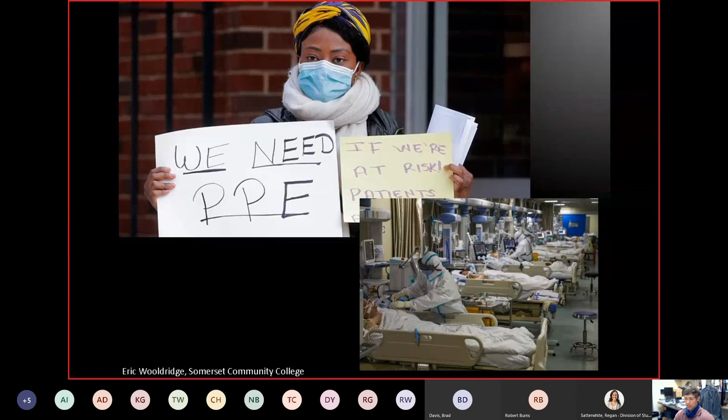Everything seemed to be great until this happened, and suddenly we're starting to reconsider the validity of that approach. So as the supply chain broke down, we needed a fix. We needed something to hack the supply chain, a stopgap solution, some way to come in and actually produce what we needed even though our entire system had collapsed.

And that is where we talk about today: 3D printing. In that moment, all of these do-it-yourselfers, folks that had 3D printers in their basement, teachers, companies that had banks of 3D print farms in the tens and hundreds, stepped up to the plate and said, we can help. We know you can't make what you need to have, but we can 3D print it for you. And so you saw the rise of additive manufacturing into the mainstream spotlight, because even though everything else was shut down, people could still 3D print.

Why did it work so well, or why is it able to step in that way? It's for a variety of reasons. When you 3D print, a single operator can run 30, 40, 50 machines by themselves, so it reduces your actual potential contamination or spread. 3D printers typically work off a condensed material supply, like a roll of filament, a bag of powder, or maybe a canister of resin, so you can take a condensed amount of material, put it in a printer, and get a lot of products.

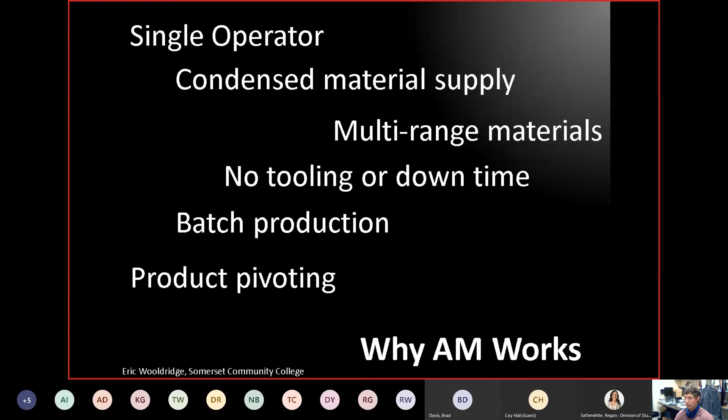If I want to do a face shield, I can. If I want to do a face mask right after that, I can. If I want to print them together, I can. This ability to pivot, to do product pivoting without any tooling or downtime, is a tremendous difference from conventional manufacturing. That's why additive was able to step in and start with face shields.

One of the very first things mass produced as a result of the supply chain breakdown was the face shield. A company called Prusa Research over in the Czech Republic — some of you may actually have Prusa printers, which are very popular — stepped up to the plate and said, all right, we're going to divert our 500-plus 3D printer bank and start producing face shields. We're going to design the face shields ourselves so that they are optimized for 3D printing, put videos on how to put them together, and share our files with the world. So not only are we going to do it, but we're going to make it possible for everyone else to do it.

And from that, thousands upon thousands of face shields were produced worldwide because of that initiative. That was the first thing. But then that got people thinking: what else could we do with a 3D printer in the midst of all this? Could I make something that someone else needs? Can I come up with a new solution that no one else has seen before? It unleashed the potential of the technology because people saw it as the thing that could keep going when the supply chain broke down. Case in point: a hospital over in Italy doesn't have these respirator valves, can't get them anymore, and obviously these are critical to human life in the middle of COVID.

So a company pops up and says, you know what, give us one, we'll make a model of it, and we'll print you what you need. We can do about 100 in 24 hours. That makes a huge difference.

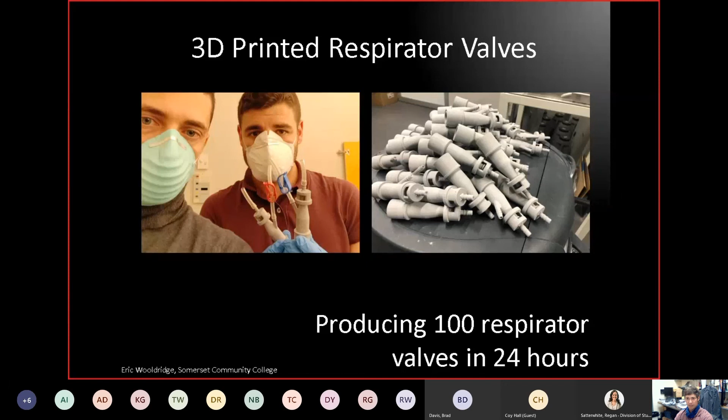And so it was one of the early ones that we saw, especially over in Europe, and that just spurred on other ideas. Somebody else said, hey, you need a stethoscope? We can print that for you. We can use these printers that we have right on our desks to make these products.

Another company steps up a little later on in the outbreak here in America. Formlabs diverts 250 of their printers up in Ohio to start producing the swab test kits. They can do about 100,000 a day using their printers. This was actually a pretty interesting process because we were a little privy to some of it, since we were considering it for Kentucky production as well.

It was a quick turnaround. We just had to have the right material, resin, and design, and it was ready to go. It was no problem to actually fire up and start participating in this process if folks wanted to. It just shows the power and how quickly somebody could step in and come up with a solution just because they had a 3D printer and knew what to do with it.

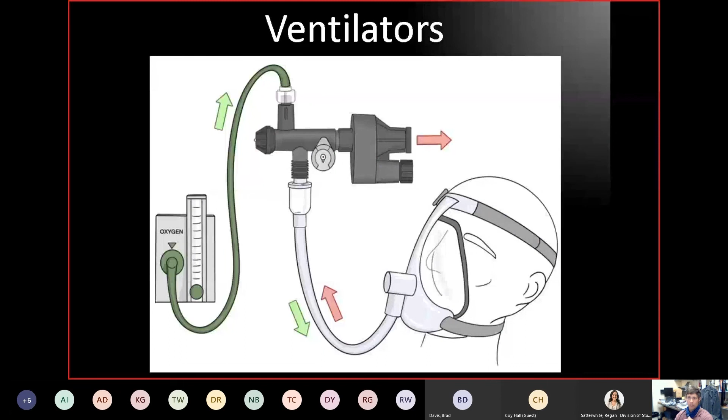Ventilators. This is basically the device that keeps the oxygen flowing one way and the carbon dioxide flowing the other way. The DoD did this. They came up with this nifty little ventilator system, totally 3D printed, and so successful they even commented that when this pandemic's over, which who knows if that'll happen, we might be able to use these in the field. They printed so easy, they're so portable, and the size is so easy to use.

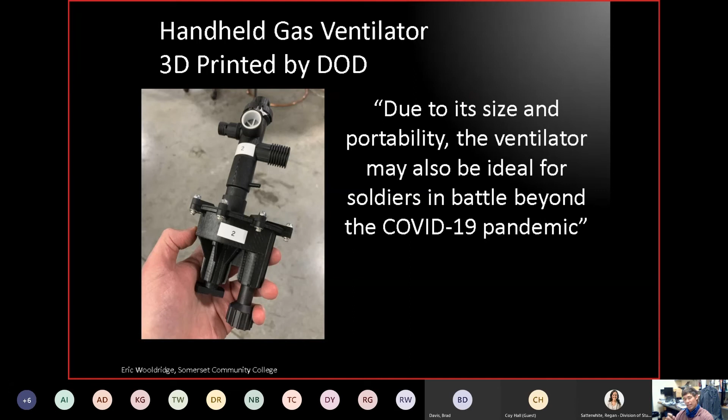This is great. And then, of course, the face masks. All kinds of 3D printed face masks are out there at this point in time, whatever style you like. The kind that are just basically a ring that fits over a cloth. The kind that are very complex with lots of parts that are medically approved, maybe not necessarily N95 but really close. The kind that are more simple. The kind that use adapters already out there to make it fit around your face. Limitless possibilities in terms of the face mask.

One of the projects we're working on with UK right now is also a 3D printed face mask, but we're going to use nano coating. UK is going to apply nano coating over top of some of the components, some of those discs you see there on the bottom left, so that it'll actually kill any microbe, any virus going in or out. So these 3D printed masks can be completely reusable, washable, and we can even incorporate them into our HVAC systems to purify the air.

Amazing technology, simply because the 3D printer will, if you understand how to use it, do what you need. Oxygen masks were made. We saw hospitals starting to realize they could 3D print parts that they normally had to buy but couldn't find anymore. So if you just had a printer, you could actually make the part, if you understand what you're doing.

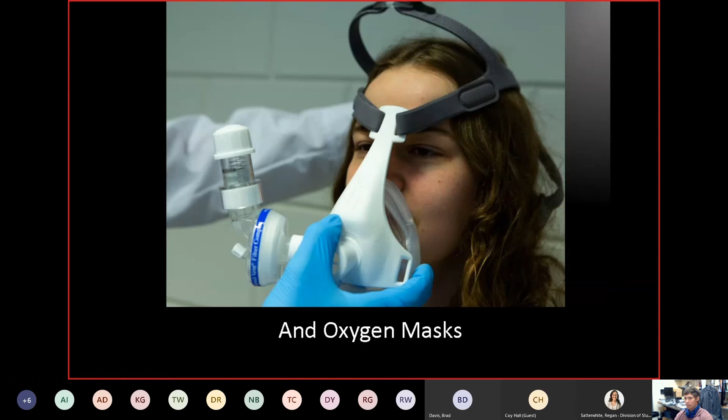Companies would step up and say, well, we're going to divert some of our more industrial 3D printers to assist in this too. This HP multi-jet fusion is an amazing system, super fast, super precise. They could take one and actually make 50 to 70 face shields or face masks in one run. And it creates more of this mentality of, we can support with what we have.

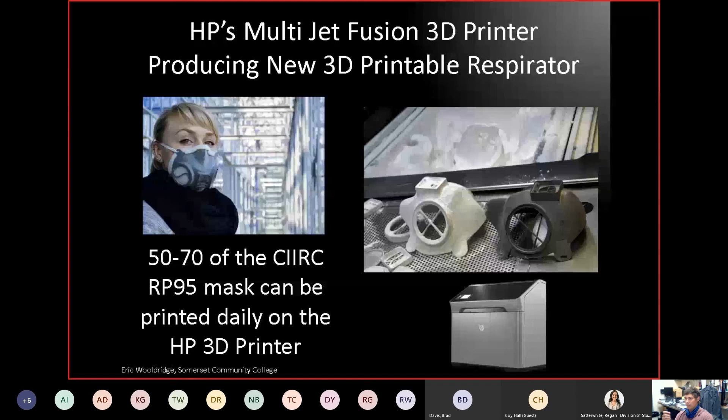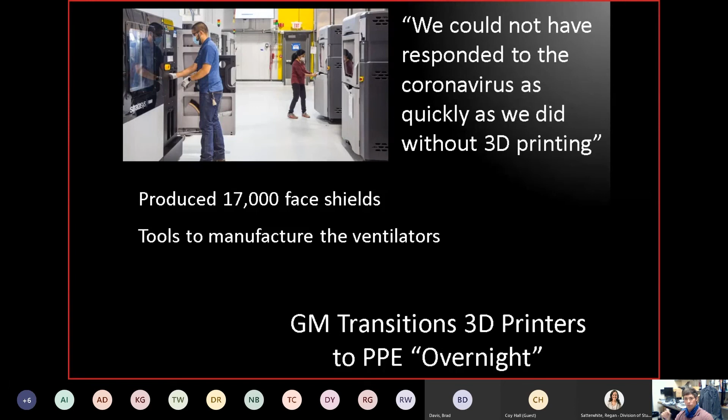GM, same story. They point out that almost overnight they were able to switch over their additive group and start producing 17,000 face shields. They made the comment, we could not have responded to the coronavirus as quickly as we did without 3D printing. Aside from the face shields, they actually 3D printed the tools to help manufacture the ventilators they were supposed to make.

And then simple solutions. You don't want to actually touch the handle of a door. Materialise came up with a design and put it out there for free that you could print a bracket off, screw it together up top your door handle, and use your forearm. You won't even go that far? You want to use your foot to open a door. There's several versions of a foot gripper that you can buy, screw into the base of your door, and open your door with your foot.

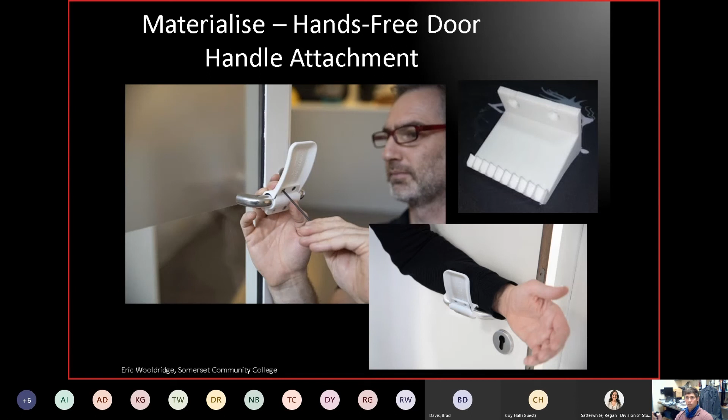Handy innovations, ready to go. All you have to have is a 3D printer, and not even that great of a 3D printer. Most of this work can be done on what we consider a low-cost printer. Stuff that's a little bit nifty, maybe a little bit more trinketish, but still a neat idea.

You want to keep your hand sanitizer from being contaminated by your hands, you can have a wrist brace that attaches it to it. At least people are creating solutions simply because the printer can make it for them.

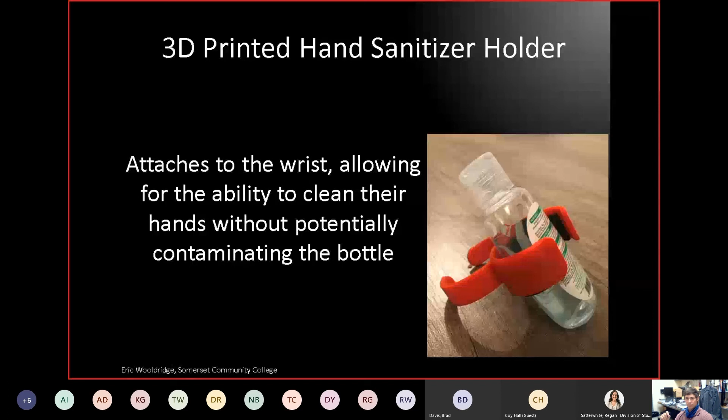A little bit more complex. Ventilators and respirators themselves are typically very complex, commercially made products, tens of thousands of dollars just for one. And so there became obviously the need to find a lower cost option. Fortunately for Spain, in Barcelona is where actually one of HP's 3D printing headquarters are. So they teamed up and came up with a 3D printed, medically approved respirator.

And you can see the parts on the screen there. They're actually really good looking parts, and that's because the HP system is actually a very, very good printer. But you can actually have a commercial product ready to go, developed in a matter of days or weeks, and ready to go out there and save lives. And then you can just start producing it as soon as it's ready.

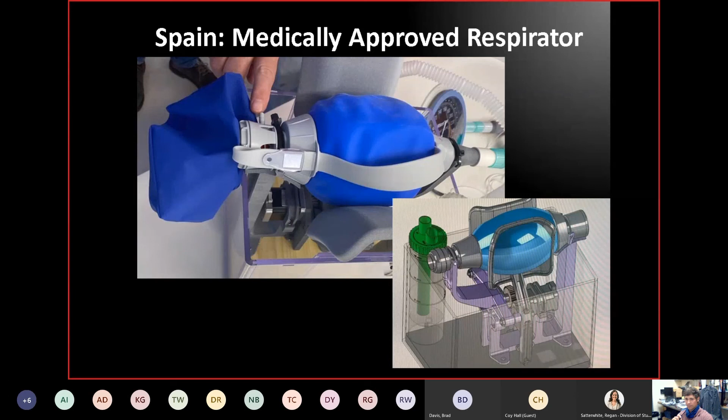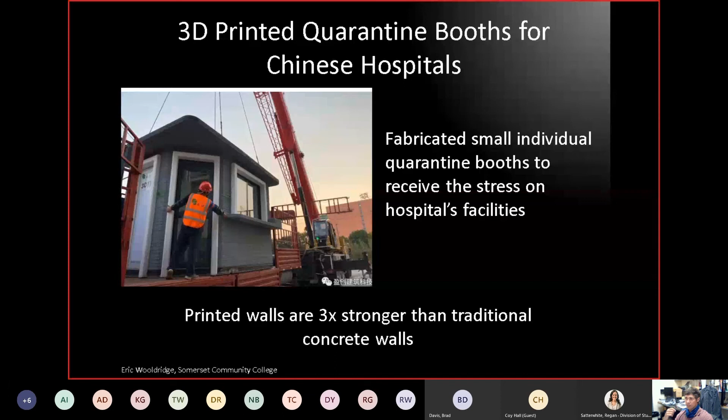Want to go a little bigger? WinSun over in China was 3D printing, and probably still is, quarantine booths for Chinese hospitals to reduce the overload. Basically prefabricated little booths where people can actually stay in quarantine, and they're actually printed in concrete, which typically is about 3 times stronger than a typical concrete wall. So you're seeing opportunity after opportunity after opportunity.

As far as SCC, what did we do? Well, our story kind of goes like this. We were already in the process of expanding 3D printing across the state, doing the courses, the curriculum, and that sort of thing.

We had just come off spring break when the semi-shutdown happened. We had about 3 days where we were planning on bringing students back, and then by Wednesday, it was pretty much said that we're going to have to switch everything online. They're not coming back. At that same time, we were seeing the impact over in Europe. We were seeing that the situation was pretty bad. The supply chain breakdown had occurred, and we were getting requests already to join in the worldwide contribution of 3D printing, PPE, and also parts that they needed for equipment, and sending them to Europe.

So we reported on that Wednesday into administration and said, you know what, this is probably going to get bad. We're probably going to need to prepare our labs for production to assist in this process, because it's coming. We saw the signs. At that time, we weren't getting authorization, so we did have to shut down the lab for Thursday and Friday. But then Monday came.

The governor's office contacted KCTCS and said, what can you do? We got together, and by that afternoon, that evening, we got approval to go back in the lab. I showed back up about 4:30 in the morning the next morning with my stuff to spend the next few nights. We started producing about 5 or 6 o'clock, and had some designs rolling off the printers by 9 o'clock that morning. Some prototypes to get us going.

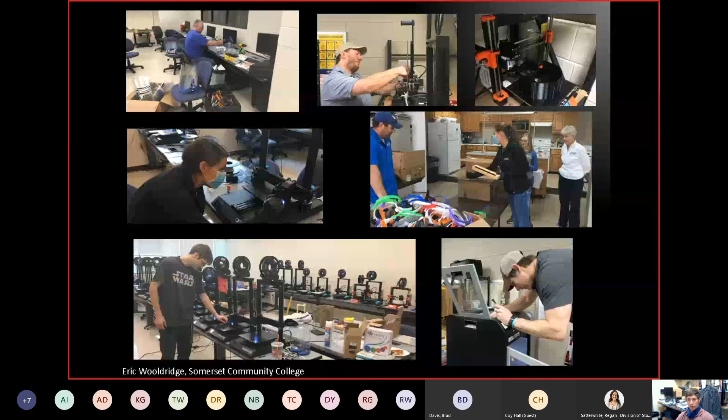So over those weeks, we learned a tremendous amount about 3D printing in general and what it's like to actually use a print farm to do scalable production. Some of those lessons are what we're here to talk about today, and things we learned from this experience and how to incorporate them later on.

For one thing, low-cost production. For the majority of all the production we did during that time, we used 3D printers that were generally $230 to $420. Everything, for the most part, was under $500. We like to use low-cost printers because we can operate them ourselves, it doesn't take a lot of effort, and we can keep them maintained ourselves. Your price point to run them is much lower in terms of material costs and those kinds of things. So low-cost, high-volume production is really where it's at.

We also wanted to focus on doing batching versus singles. We worked with a different group statewide, and a lot of people had different mentalities on how to do these face shields, which was our primary mandate. On the left you see a picture of one of the smaller headbands used in the face shield design. The face shield essentially has 3 major parts: some type of headband, some type of transparent material, and an elastic band to keep it around.

So one version of the bands is the small one. People liked it because it could actually print very quickly. The problem we saw was, you can actually see glue in that image to hold it down, but also a human being has to come in and swap out the part and restart every time that printer finishes. Another variation is to actually print several on the build plate at once, which is batching, but you're still dealing with downtime every time it finishes.

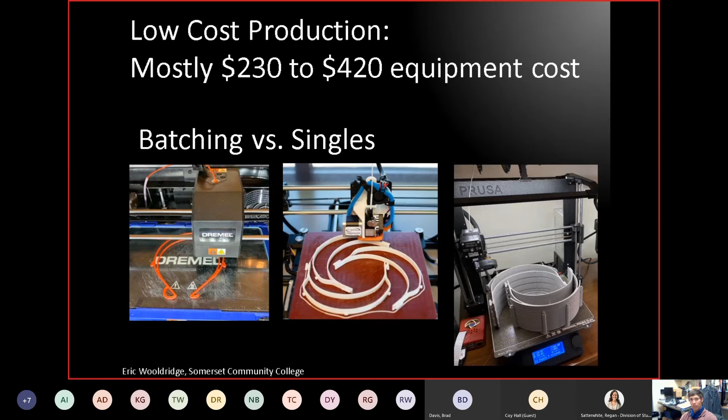We also had multiple sets of production cycles. If we wanted to do a number of headbands over an 8-hour period, we would set it up for 8 hours so we were coming in a normal workday and cycling back off. Then we have the same headbands with a larger number set for 16 hours, and another set for an even larger number for about 23 hours. That way we had a production cycle type for the weekend, so one person could come in once and reset per day. Then you had a nighttime cycle, and of course your regular day cycle. That production cycling was key to us being able to produce a larger quantity with minimum effort.

Because again, with a well laid out production cycle, one person can easily run 30 to 40 printers and keep them cycling if they plan it out.

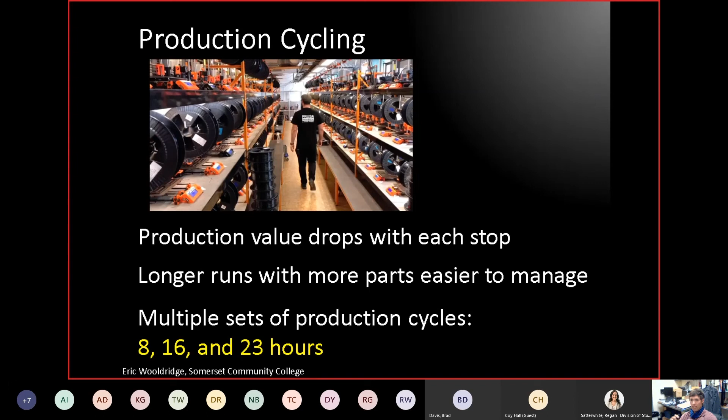Another thing we learned during the process was the need to say no. This is actually kind of counterintuitive to 3D printing, because normally we talk about how with 3D printing you can improve something continuously. If you have a better design, you can implement it one day and your product is completely updated from there on out, which is great. But in our case, since our mandate was to produce as many of these face shields as possible, we had to stop and say no to a lot.

I would get emails once people saw some of the news articles and those kind of things, and they'd say, hey, are you doing this face shield type? Are you doing this face mask? Have you tried this new design? And there were lots of new designs. What we had to do is turn around and say, no, our mandate is to keep producing in the higher volume, because every time we stop to implement a new design, that resets everything and creates a new learning curve to have to work with.

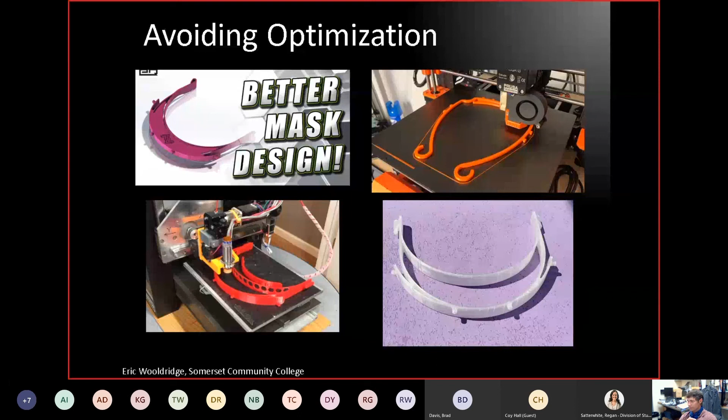But then there was a problem that had really nothing to do with the 3D printing; it's just the reality of the situation. In fact, the 3D printing of all the parts that we needed was actually pretty easy when you look at it. The problem was the logistics and the manpower. For example, this face shield requires a transparent material. Well, all the plexiglass was gone. I mean, just gone. We called everywhere.

So we had to switch to using overhead transparencies, which essentially meant that, although I would get permission, I was crawling around in people's offices at night trying to find old stockpiles of transparencies in closets and everything. We found a lot, but it ran out quickly. Even the elastic bands were running out very, very quickly. So we had just the raw material issues.

We also had great companies that came alongside. Jamel Industries of Jamestown came alongside and donated thousands upon thousands of elastic bands to make the face shields. And then Danville Office Supply also kicked in and donated a lot of transparencies and helped people who wanted to support buy the transparencies at cost and delivered them right to the door. So that helped a great deal.

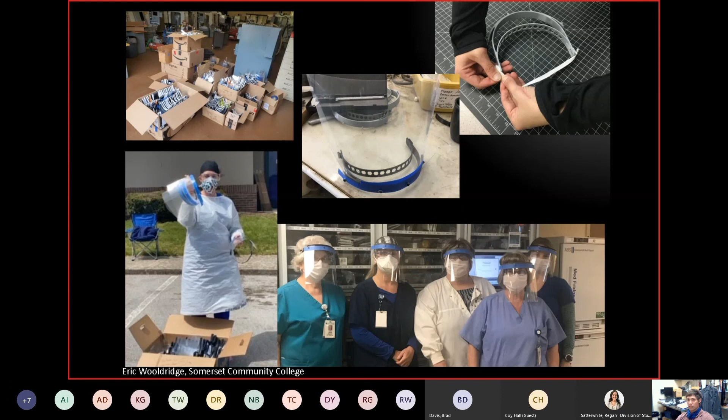And to be perfectly honest with you, sometimes we would have cases where people would actually be in tears when they received a box of these things because they felt it made them feel a little bit safer. And in those moments, it was really, really worth it to use the power of this technology, what we had been building for the last 7 years across the state, to actually see it make this kind of a difference, making people feel safe and protecting lives. So a lot of hard work, but really something that was extremely rewarding.

And 3D printing in general provided an opportunity for anyone to join in and help. It didn't matter who you were, where you were. We actually had a cloud site where people could go and get the same files we were using and the settings and the tutorials that we prepared and join in and help for their own community, or they could send it to us and we would get them shipped out.

And so what you actually saw were a lot of kids who had 3D printers at their home. Maybe they got together with a few folks at school or something and went into a lab, and they were able to assist by 3D printing the ear savers, the face shields, the things that were making people at least more comfortable, and in some cases saving lives. And it was a powerful, powerful thing to see that happen. To be empowered where they can actually do something that really makes a difference.

It's very exciting times. But after all of that, we go through this, and the whole world's going through this. We're seeing what 3D printing is doing. You start to see articles that look like this. People start to comment. Researchers start to look at 3D printing and the broken supply chain. The digital supply chain reckoning. You know, what happens now? Now that we have seen what 3D printing can do, and now it's mainstream, and now we've seen how it is not really affected by the normal things that our supply chain is affected by. What do we do next?

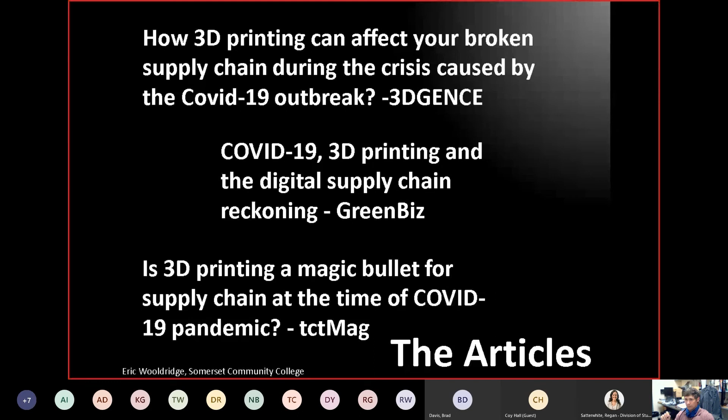And of course, that creates a whole new horizon for additive. Companies have now woken up to the fact that this technology can eliminate a lot of problems they didn't even realize they had. One way of saying it is, now that the genie's out of the bottle, so to speak, what happens next? Well, we start to see the signs when you start to see things like policy and procedure changes. When you start to see entities like ISO and ASTM start to make processes for 3D printing specifically.

One thing that we saw early on was the NIH, the FDA, and America Makes get together and come up with a streamlined approval process for 3D printing of medical PPE type of products. So there's a need, there's a solution with additive, and now there's a process for the FDA and NIH to accelerate the approval process, so it's not talking years, it could be just weeks, and then that company, or the whole world for that matter, could start 3D printing the solution as long as they follow the standards. And we saw quite a few of those opportunities realized during that process.

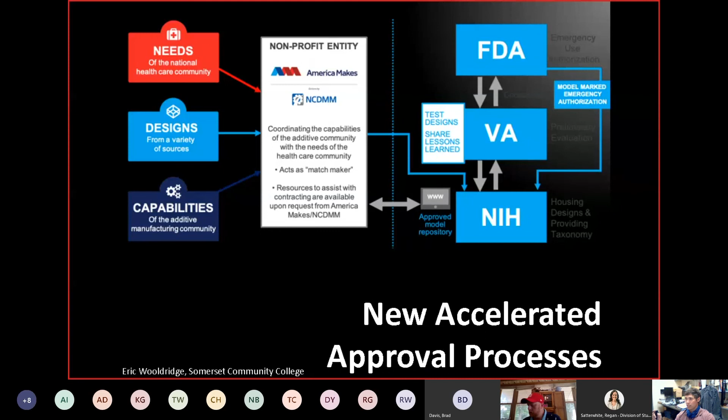Another entity, the ASTM, where we get a lot of our standards for manufacturing, has international standards now for 3D printing, design, production, and testing of PPE. So now we have a pathway to accelerate the production, the process, the approval, and get more products into the field that are trustworthy and ready to go.

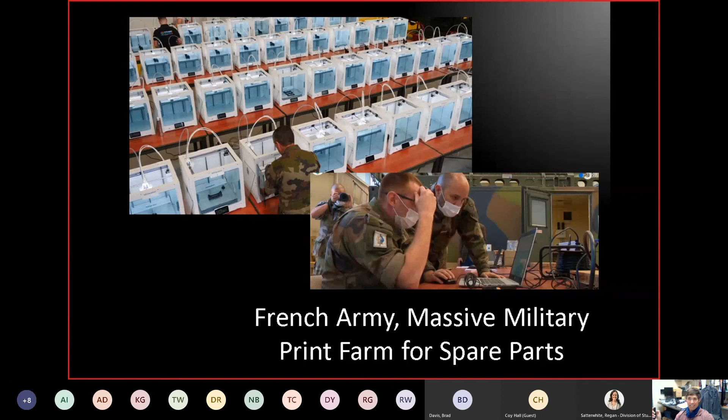So those standards have changed, those policies have changed, which means that companies and entities are making some bigger additive manufacturing moves. Case in point, the French Army. After seeing this huge supply chain breakdown, what do they do? They go out and buy a ton of printers to set up their own print farm, so they don't have to worry about supply chain breakdown for a lot of their parts. They can just make them themselves. They see the fragile nature of the supply chain, and so their solution: we'll just make it ourselves. And to be perfectly honest, an investment like this to set up a print farm is not that big compared to military spending.

You look at the Air Force, Space Force, you know, the head of acquisition for the Air Force says 3D printing is going like gangbusters. They've seen the weakness in the supply chain and how that affects combat readiness.

In fact, there's some that point out that America's biggest weakness in terms of combat strategy is the supply chain, not the actual combat itself. It's the ability to get what we need is so fragile. This is our biggest threat to national security.

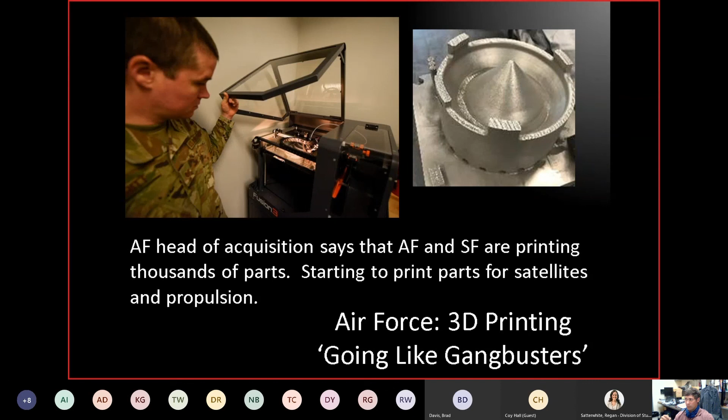And so not only are they already printing parts that are going on planes and helicopters, they're starting to print parts for satellites and propulsion. And it just keeps growing and growing. Even the Army had a nice little project to start 3D printing customized earplugs to reduce the risks of hearing damage, which can affect combat readiness.

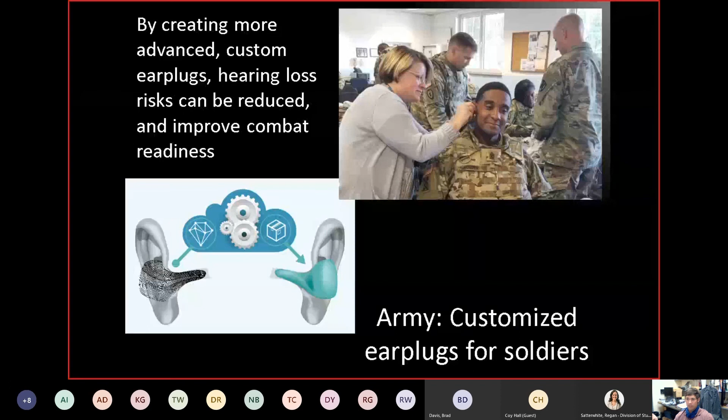And in terms of medical, another major recent breakthrough that we just want to talk about is the fact that another heart has been 3D printed, an actual working heart pump that is made from real human cells. You can Google this anytime you want to. It's easy to find. It's one of the first times we've seen video of the actual heart pump working instead of an animation. And they also have a time lapse on there of literally this little thing being printed by the machine. It's really awesome to watch and just realize that's human cells being turned into a working heart pump.

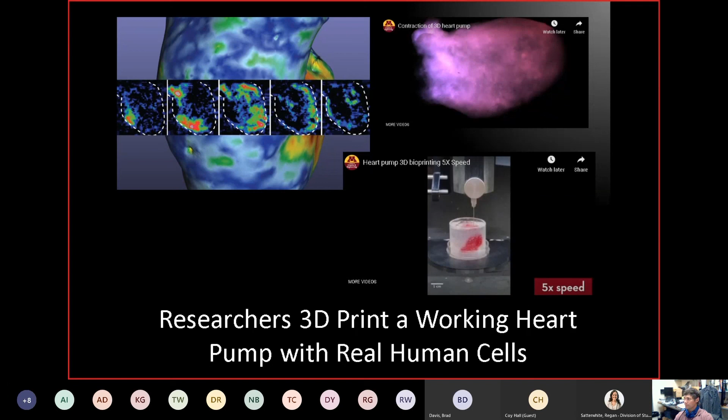Pretty crazy. You can also look at companies that are already in the manufacturing field that see this opportunity and see the writing on the wall. Henkel, for example, they employ 55,000 people worldwide, manufacturing facility, and now they are expanding their additive. So if you have a supply chain breakdown, you call Henkel and say, I need this product, I need this produced. They'll scale up and print it for you. If you have a new idea for a product, new innovation, you go to them, and so you can avoid the whole supply chain issue and months of planning and coordinating to get something made. Now you can actually just have it 3D printed.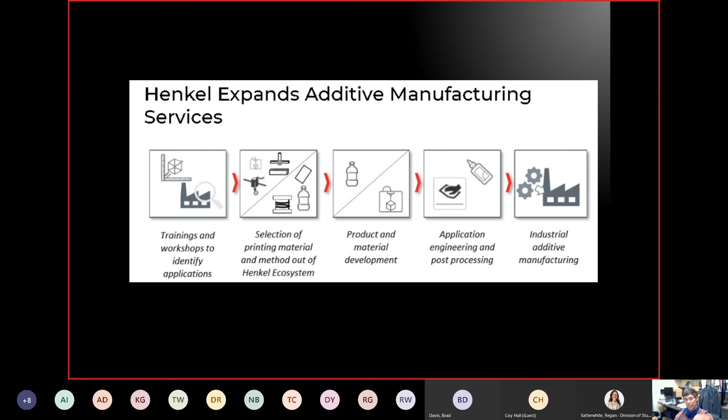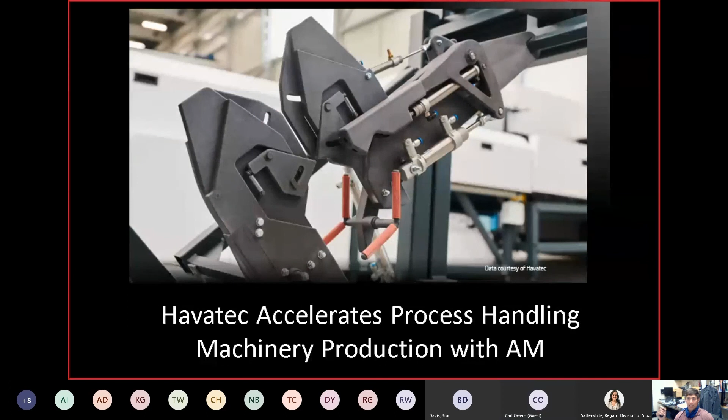You look at smaller companies. Havatec is actually a company that makes machines that do agricultural product sorting, and they were affected by the supply chain breakdown. So now what they've done is just gone out and bought some industrial printers, and they're just making their own parts. Now they don't have to worry about the supply chain. It's actually saving them money in the long run. They have complete control of their process, and even the parts look like real conventional parts. These systems are so fast and so good, it's hard sometimes to make the distinction. And so not only are they saving time and basically protecting themselves from risk, they're also saving a lot of money.

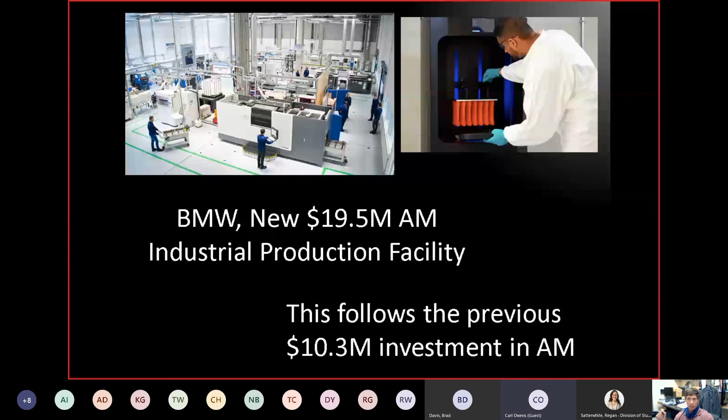BMW is another company to look at. This is their third big announcement. A couple of years ago, they announced their $10 million expansion for an additive production facility. Now they're throwing another $19.5 million at it to expand it even more so they can go more and more additive production. They see additive as the way to go, and they want to 3D print as much as they can for their vehicles.

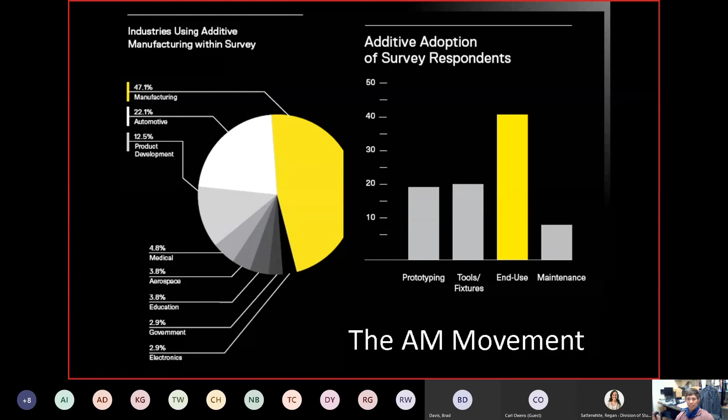Look at your federal spending. Louisiana just got another $20 million to be spread across 5 to 6 universities and no telling how many schools to advance some of the material science associated with 3D printing and to teach additive manufacturing in their colleges and schools. The overall goal, get this technology into the hands of our people and let them use it to innovate and create new things. Let's not have the supply chain problem when everybody knows how to 3D print and they know how to 3D print correctly.

And then this one, very, very recent, pretty exciting. 3D printed ovaries. This test has actually already been successful. They have 3D printed ovaries, put them in a mouse, and that mouse has successfully given birth to healthy offspring. Just think about the impact of that and what that can mean for so many folks. And this is just another case, another leap of this technology in doing something that is almost sci-fi in nature.

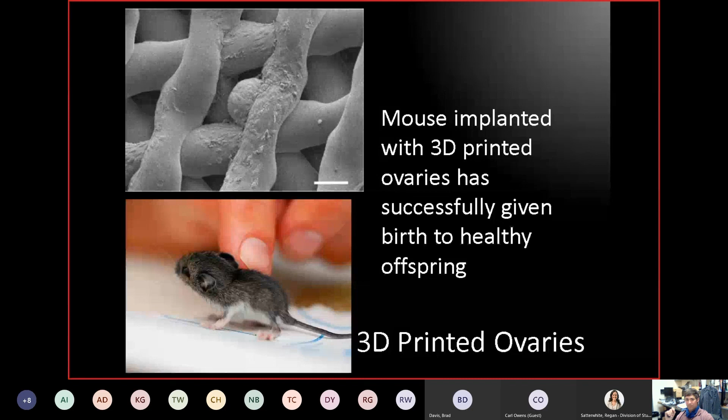So yeah, mice have been born through 3D printed ovaries.

The Army really loves the idea of using low-cost 3D printers to produce things in combat zones. Although they have high-end equipment, they prefer the low-cost equipment because it's a lot easier to print with, maintain, and put into a combat zone.

The problem with the low-cost equipment is the material. It wasn't super strong, so they came up with their own material, a new type that's actually a combination of existing stuff.

They did an apples-to-apples comparison with a 3D printed version of a part alongside a typical ABS plastic part that's injection molded, and the 3D printed part with the new material is 15 times tougher than the conventional injection molded part. That, of course, is incredibly telling.

And that filament, you can use it with any printer. So that means a roll of filament can now make the difference between a part that's battle ready or not battle ready. Material is part of the game too.

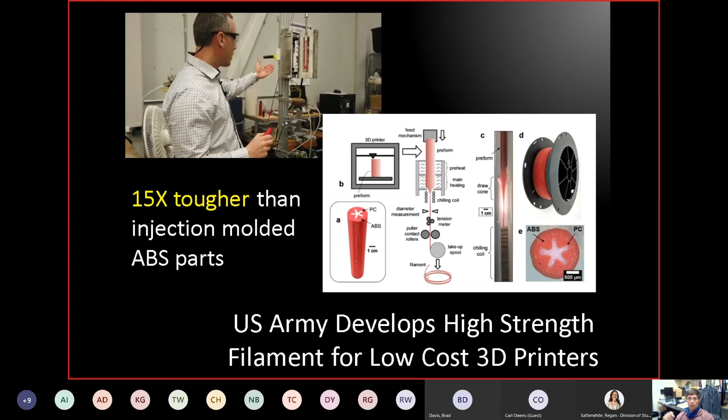We actually see this also. Benvic has come up with a new line of PLA, for those familiar with that term, a new plastic that prevents bacteria from growing on any surface. They're rolling out this plastic so you can print with your printer and make medical tools and products that won't have microbial growth. So it's very much a materials game to go with all these printers out there.

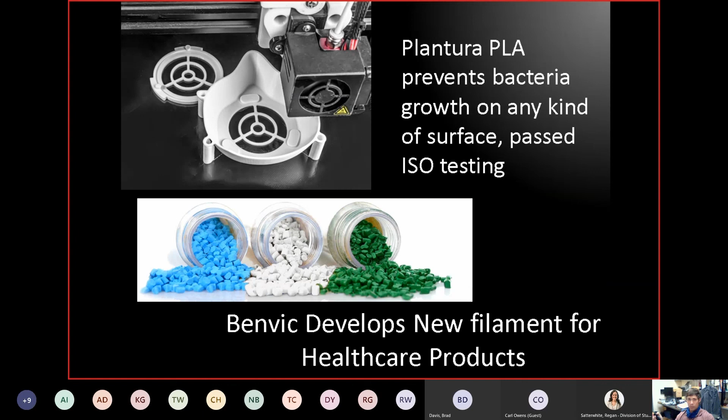So after thinking all this through, seeing what's happened out there during COVID, and what may happen again, we're almost out of our supply of face shields that we stockpiled, so we may have to fire back up and produce more. What are we doing now to advance Kentucky in additive manufacturing?

One of the things we had planned is our mobile AM project, funded by the National Science Foundation ATE program. This trailer was going to be loaded full of advanced 3D printing equipment and computers. It was going to come right to your site, spend a day or two doing advanced 3D printing, advanced design, scalable production mentality, and training in the real stuff, moving away from keychains and trinkets to start doing the things that really, really matter.

But then COVID happened, and we were not allowed to do face-to-face training at this point in time. So that project is being put on hold. We do anticipate that we'll be given the green light eventually, but right now it's held in place.

At some point in time, we're going to get approval. We're going to come to locations all across Kentucky and start bringing the advanced equipment, 3D printing and advanced materials, and doing this training, but we just have to wait a little longer. We'll talk about how we'll announce that kind of thing a little later on.

But what did come out of COVID that was pretty awesome is this new project referred to as RAMI, the Rapid Response Additive Manufacturing Initiative, based on what we did during COVID and our ability to pivot, create a whole new product line, and step in for the supply chain breakdown.

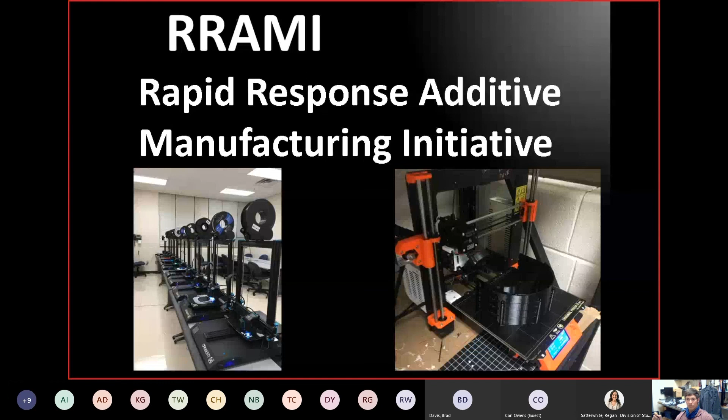We were federally funded to start creating 4 to 6 new sites across Kentucky to mimic our own, capable of doing higher volume production like we are, and also ready to support the supply chain during a breakdown.

Part of the deal is that each of these sites, which will actually be KCTCS community colleges in many of your areas, will also be offering our 3D printing certificate. So students can get a certificate in additive manufacturing and gain the advanced skill sets that are needed. They will also be required to offer more dual credit courses so high school students can start getting in on this early with the advanced skills and additive manufacturing focus that's making all the difference.

Now, RRAMI is also designed to be a real world solution, so we will test that solution every so often. Once these sites are set up, we'll do simulations once or twice a year where we come up with a scenario like: hey, this product has been stopped due to pandemic, natural disaster, or terrorism. We can't get it, we need it. RRAMI network, we need you to take this design, fire up, and produce it in the next 16 hours, and let's send them all to one site.

A demonstration of cloud manufacturing and how cloud manufacturing can actually solve problems when well coordinated.

It'll be kind of the first of its kind. People have talked about it, but no one's actually done it, and no one's done it on a statewide scale. So we're going to be the first ones to actually demonstrate that this is a viable production methodology. We're very excited about that because that's going to mean a huge difference for every region that gets one of these sites, in terms of training and also what can be done.

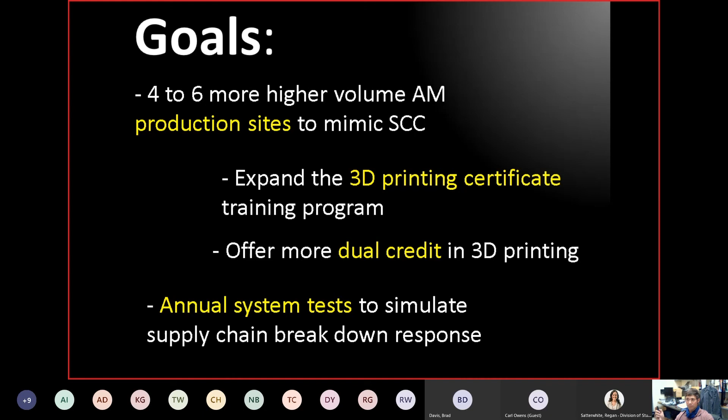RRAMI comes with one additional thing: a relatively new breakthrough that we actually had right before COVID, and because of COVID we had to put it on the back burner. But we now have the ability to 3D print in metal using low-cost equipment. Typically, if you wanted to do 3D printing in metal, you had to buy a $100,000 piece of equipment, safety training, and that kind of thing. Now there's a way to do it with low-cost desktop 3D printers.

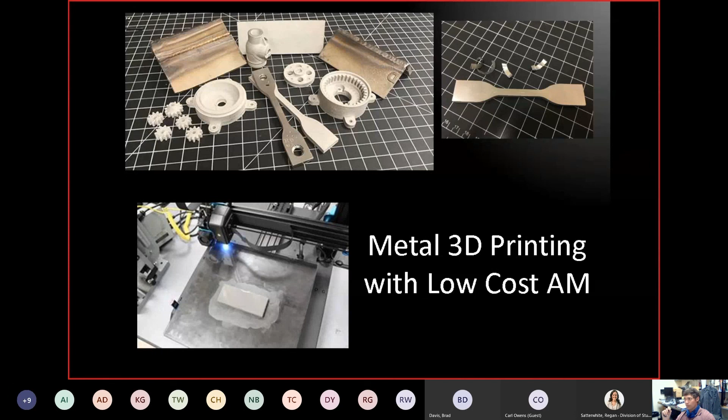What you see at the top of the screen, that's all stainless steel. You can see the tensile test dog bone in the middle where we've poked at it and ground off the surface to see the surface finish. Full-on 316L stainless steel, produced on a 3D printer that costs less than $600. Technically the printer costs about $450, plus $150 worth of upgrades, and you've got a legitimate metal printer. No safety requirements, no safety features necessary, no safety training. Aside from COVID, you don't even have to wear a face mask.

But you can actually be producing metal printed parts in your labs with a desktop printer, which we see as a huge opportunity for Kentucky to be the first doing this all across the state, so students have exposure to metal printing and are producing real metal products, not just stainless steel. You can also do this in tool steel, titanium. The materials just keep coming out. It's an opportunity like no other.

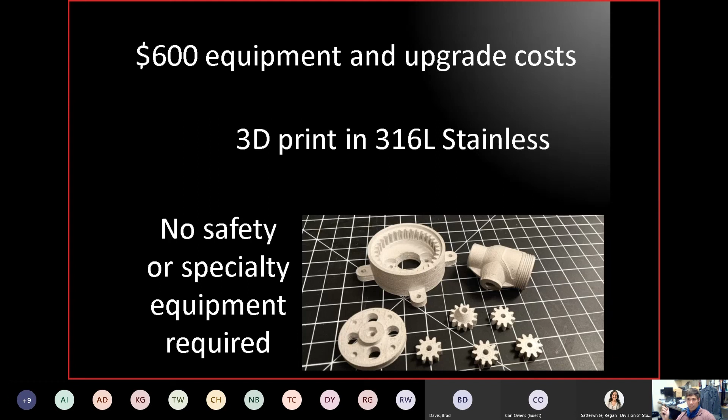Furthermore, we were actually the first in the world to test the weldability of these parts. We took some of the parts we 3D printed on these $600 printers, welded them together, and the bottom piece you see there is actually 3 pieces welded together, and you can see how good the welds were. Now granted, we have a really good welding instructor, Carl Owens, on staff - many of you know him, so he's really, really good - but the process works. We've actually seen some really favorable properties associated with the welds in terms of part performance.

So we're 3D printing stainless steel on a $600 printer. It's weldable, it's workable, and has some unique material-associated properties. This is a huge deal for Kentucky, and a huge opportunity for us to expand our workforce and be one of the only workforce states in the nation where everyone knows how to do metal 3D printing and is doing it on a low-cost basis. We're very, very excited about that.

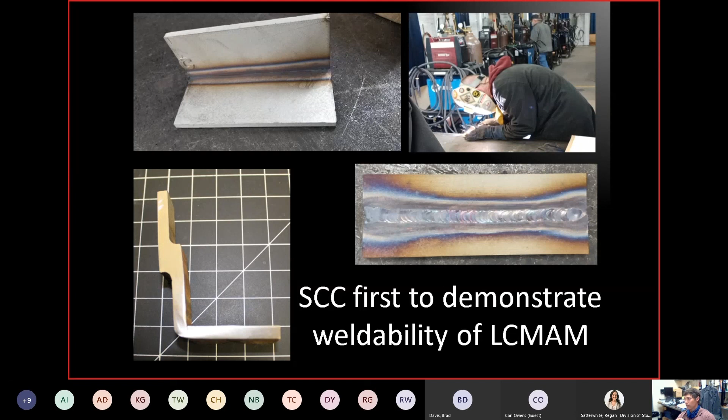Along with that excitement, coming up we will be releasing information on which sites will be selected as RRAMI sites across the state - 4 to 6 of them. We're still not sure exactly on the budgets, how many we'll be able to get, but we'll be making an announcement later this fall on who is going to be RRAMI. We'll also be making announcements as soon as we get the green light on when the mobile AM training will begin going across the state, setting up workshops to do advanced 3D printing on site.